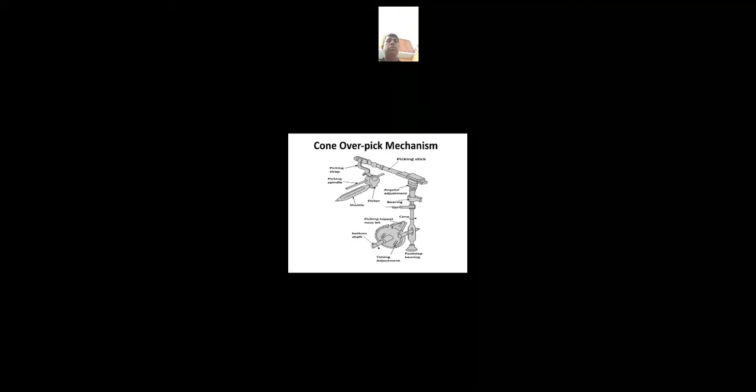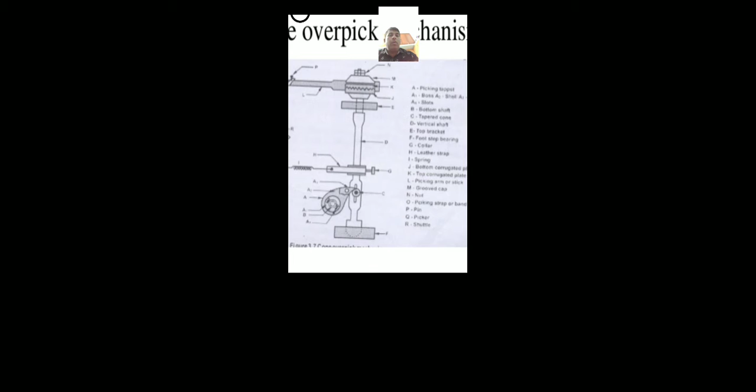The same diagram, you can see.

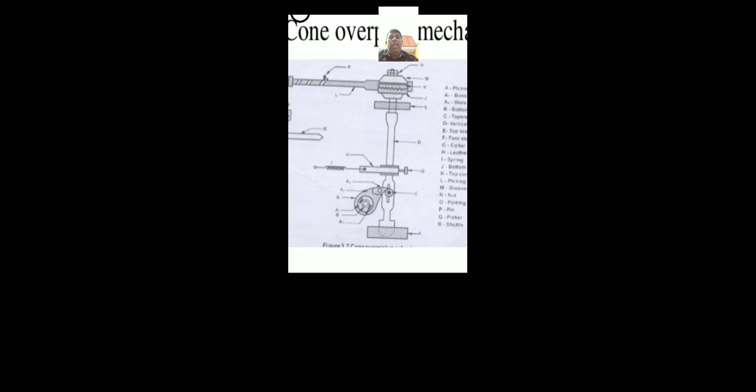See the various parts. So here you can clearly see A1, A2, A3, all these are smaller parts of the picking tappet, and you can observe that C is the tapered cone.

Please observe C is the tapered cone. I will show you the video at the end of the class. So C is the tapered cone and D is the vertical shaft. Please observe D is the vertical shaft.

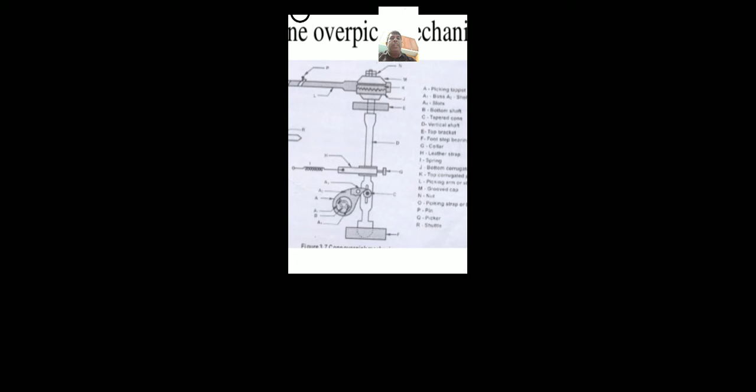E is the top bracket, meaning some kind of bearing. F is the footstep bearing, G is the collar, H is the leather strap, I is the spring.

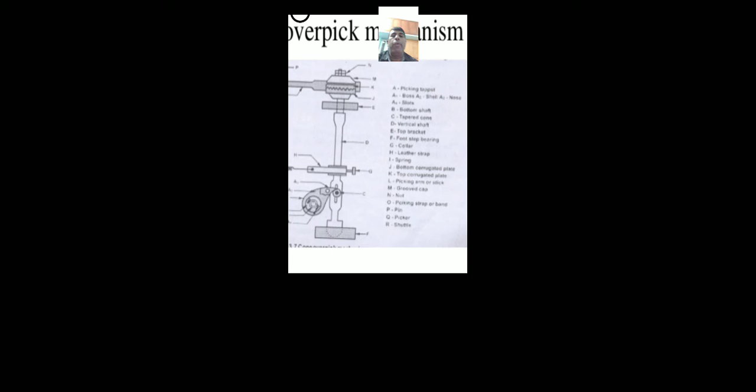J is the bottom corrugated plate, and K is the top corrugated plate. That's what we have seen in the previous diagram, angular adjustment, which is done with the help of top corrugated plate and bottom corrugated plate.

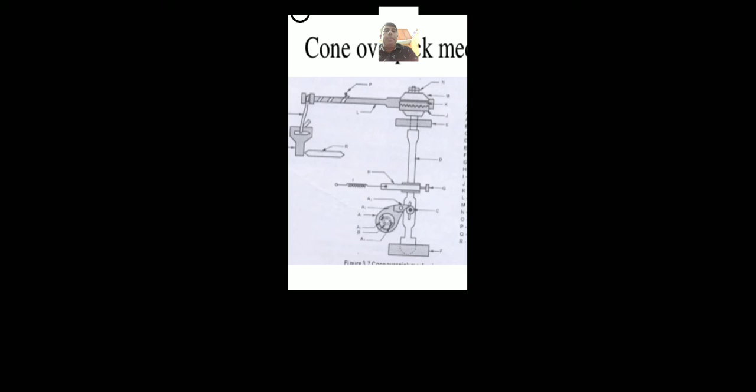L is the picking arm or picking stick, which you have already seen in the earlier diagram, and M is the grooved cap, and N is the nut.

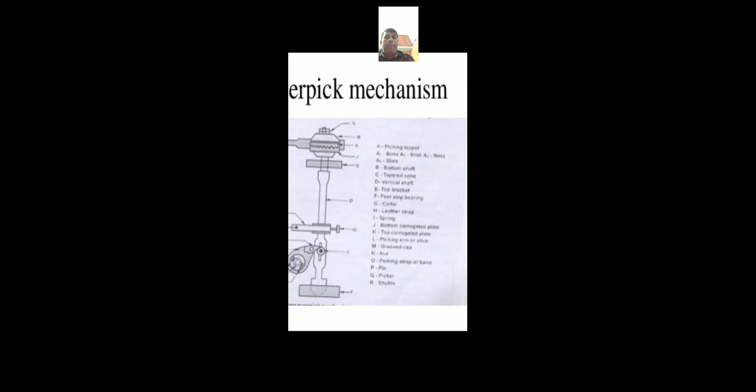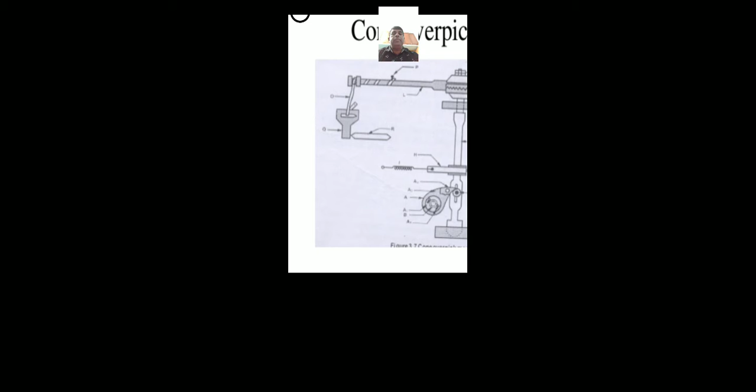O is the picking strap or picking band, made up of leather. Next is the picker, and similarly like the earlier diagram, picker is in contact with the tip of the shuttle.

Cone overpick mechanism construction.

There are about 10 points, so please observe. The picking tappet is fixed to the bottom shaft.

So what do you understand by this? Both the shedding tappets and picking tappets are fixed to the bottom shaft only. The bottom shaft contains picking tappets and shedding tappets.

Picking tappets are placed on two sides. Shedding tappets are in the middle of the loom, whereas picking tappets are at the extreme ends of the loom.

So please make a note that the picking tappet is fixed to the bottom shaft, similar to how shedding tappets are mounted on the bottom shaft.

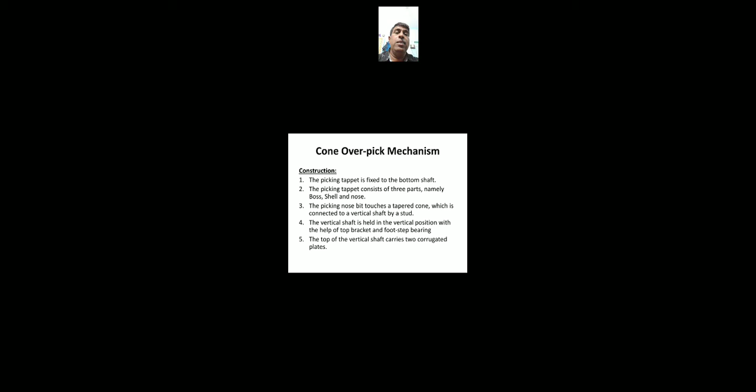We have come to know so many parts in these steps: picking tappet, bottom shaft, nose bit, tapered cone, vertical shaft, top bracket, footstep bearing, two corrugated plates. These are the parts we covered and how they are constructed to form a mechanism.

Construction continued. The bottom plate is fixed rigidly and the top plate is placed upon the bottom plate such that its position can be altered to change the strength of the pick. The top corrugated plate and bottom corrugated plate are angularly positioned so that the strength of the pick can be changed.

What does it mean by strength of the pick? The acceleration at which the shuttle is propelled across the shed, that can be changed.

So what is acceleration? Acceleration is change in speed. You might have studied this in physics. Acceleration is what? Change in speed is change in velocity.

Suppose I run at 40 kilometers per hour and then after some time my speed reduces to 20 kilometers per hour, then that is known as 40 minus 20 by time. So that is known as acceleration. That's what I remember, I hope it is correct. So acceleration is change in velocity.